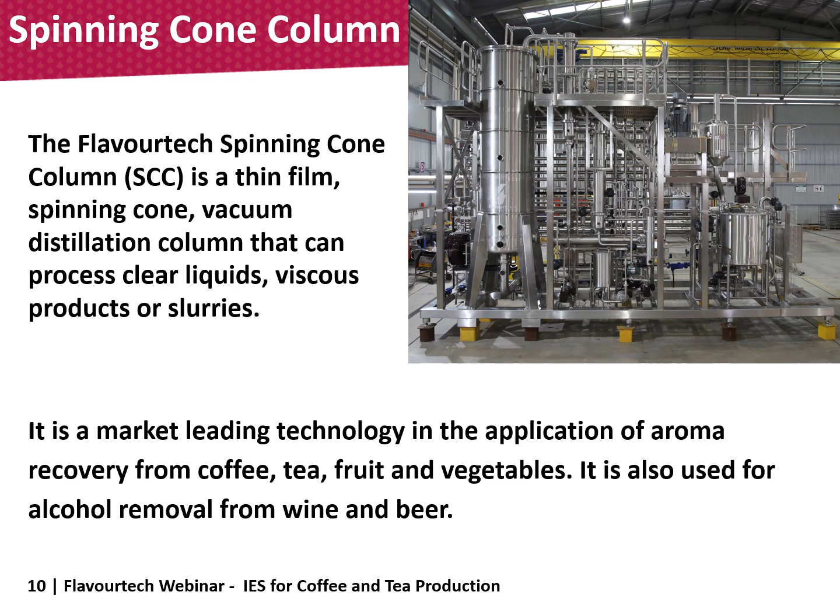In the opposite direction, we have steam going up the column, mixing with the product and picking up all the important volatiles. This steam vapor then exits the column, going through a condenser to create a very clear liquid aroma that can be used further on in the process.

The spinning cone column for tea and coffee, especially for ready-to-drink products, can not only capture the aroma, but can also brew the product in the 30 seconds that it takes to go through the column, making it very unique. The various parameters that are available on the spinning cone column also allow various flavors to be captured or various temperatures to be used to capture the very best aromas from the product that you are processing.

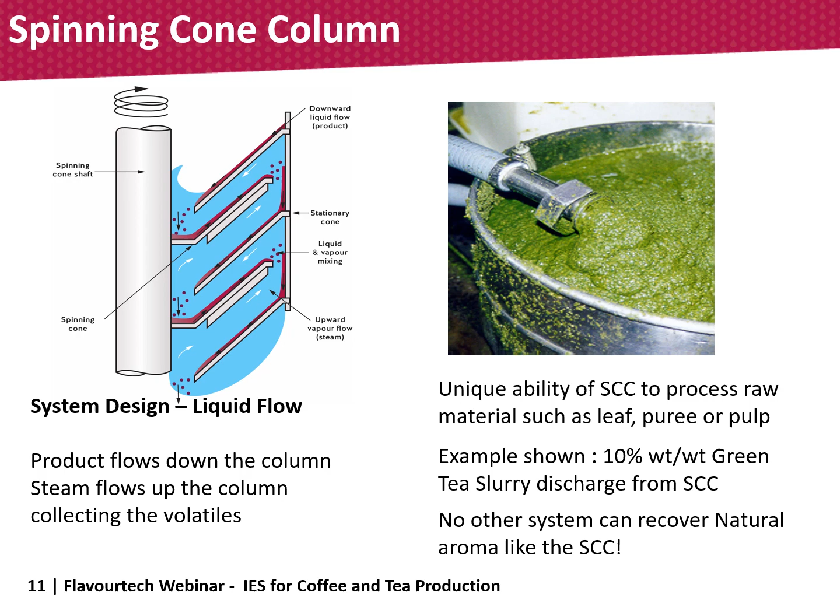As mentioned previously, Flavourtech's core business is in the tea and coffee industry, and for over 35 years we have been helping our customers produce the very best aroma from their process to be added to their final product. We now have over 100 spinning cone columns that are utilized to capture coffee aroma around the world, and over 70 spinning cone columns being utilized to make ready-to-drink tea products.

So Paul, I think I've been talking too much. Maybe you should do a little bit of talking.

Can you tell us a little bit about our Centritherm evaporator? Yeah, thanks Leon. The other core product in our range utilizes thin film as well with spinning cones, but it's called the Centritherm evaporator. This system is engineered to minimize product contact time to only 1 second, all while operating at low temperatures. These unique features make it an unparalleled solution across various industries.

Ideal for the concentration of delicate and heat-sensitive products, this evaporator ensures that the integrity of the products is preserved during the evaporation process. Its capability to handle viscous products adds to the versatility, providing a solution for a wide range of substances. It is suitable for the concentration of high-value products, particularly in small batches or as a final evaporation stage where the products become more sensitive as viscosity increases. It also excels in solvent removal, offering a comprehensive solution for industries requiring efficient and precise evaporation techniques.

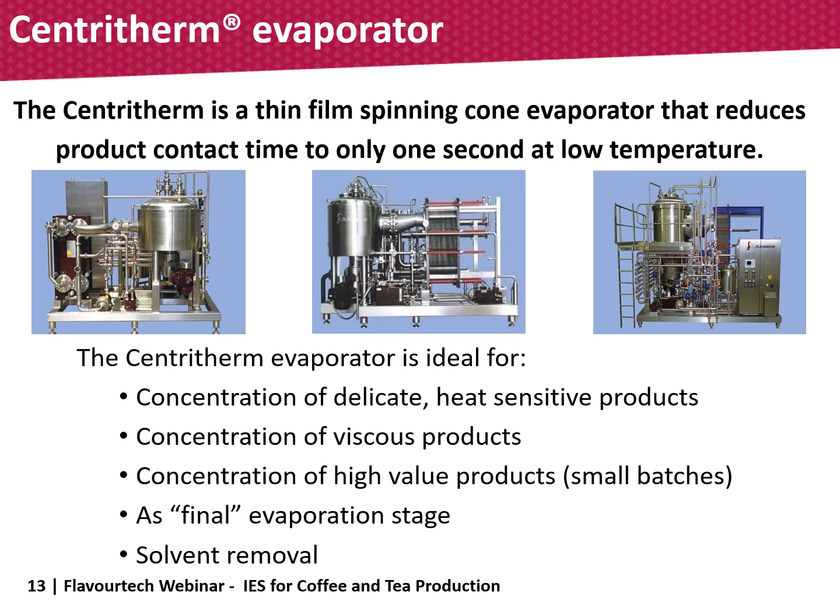One of the defining features of the Centritherm is the incredibly short residence time of just 1 second, setting it apart from conventional methods, which use much higher temperatures and much longer residence times. Unlike other evaporation processes, the Centritherm's swift 1 second residence time is a standout. In the case of coffee extracts, this rapid evaporation ensures that the coffee extract undergoes minimal exposure to heat, preventing any damage to its delicate composition. The low operating temperatures further contribute to the gentle treatment, preserving the integrity of the extract.

I suppose, Paul, what we should also point out is that the Centritherm evaporator is a very compact system and it's available in various sizes. This unit here that we have on the slide is our CT9 evaporator. It's about 3.5 meters tall, about 6 meters long, and it can evaporate up to 2.5 tons of water per hour. It's ideal to be used as a finisher in the coffee industry and take that concentrate from your traditional evaporator up further without any damage to color or flavor. That's correct, Leon. It's very versatile indeed, and there are various sizes to choose from.

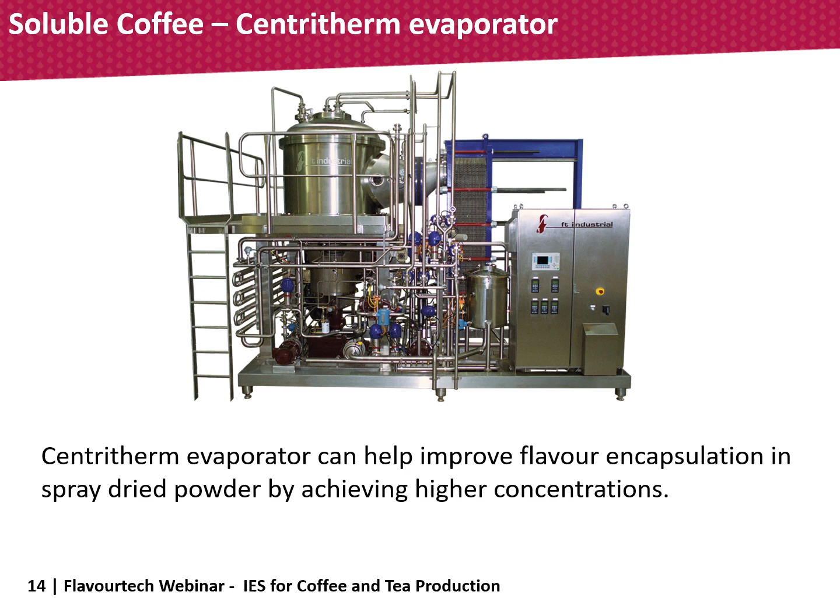Thanks, Paul. I'll take the next one, which is the rotating disc column, or the RDC as we call it. Now, this particular technology was developed by Flavourtech specifically for the coffee industry, and that'll become apparent as we move through the presentation. But it's a solid liquid contacted column that allows a solid and liquid to be processed, as I just mentioned. So in terms of ground coffee and water, it can be processed through the system where we can go up to temperatures of 190 degrees, pressures of almost 20 bar, and of course control the flow to do the solubilization of coffee as required to meet various yields.

The beauty of this is it's a continuous process. It's not a batch process or a semi-batch process. It's a continuous process, and it allows a solubilization of coffee in only 20 minutes.

Thanks, Leon. Moving on to our next technology. Now, Flavourtech is known for its gentle yet effective extraction and evaporation systems, but we have joined forces with Aquaporin with an exclusive distributorship agreement. This strategic alliance focuses on introducing their forward osmosis or FO products specifically tailored for the concentration of coffee and tea aroma, cold brew coffee and tea, extract concentration, as well as aqueous aroma concentration.

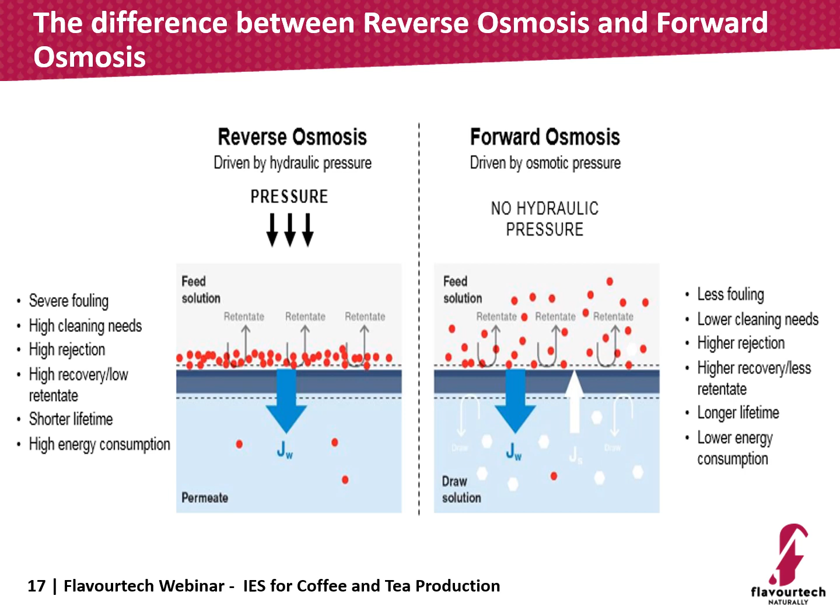The unique benefit of this particular Aquaporin forward osmosis system is the actual protein used to allow the water to traverse the membrane. Aquaporin proteins, which are found naturally in cells, were discovered in the 1990s, and the person who discovered it won a Nobel Prize for it. Aquaporin in Denmark were able to synthesize this and allow only water, selectively water only, to traverse the membrane compared to other forward osmosis systems.

Integrating the spinning cone column as the front end to the forward osmosis system allows the concentration of aqueous aroma, cold brew coffee and tea. The SCC, known for its efficiency in preserving delicate flavors, operates as a first step to the forward osmosis system, enhancing the overall quality of the final product. By leveraging the SCC's capabilities, producers can ensure a more authentic and vibrant aromatic profile in their final beverages. Forward osmosis, known for its low temperature operation and minimal energy requirements, complements the SCC's gentle extraction by utilizing osmotic pressure.

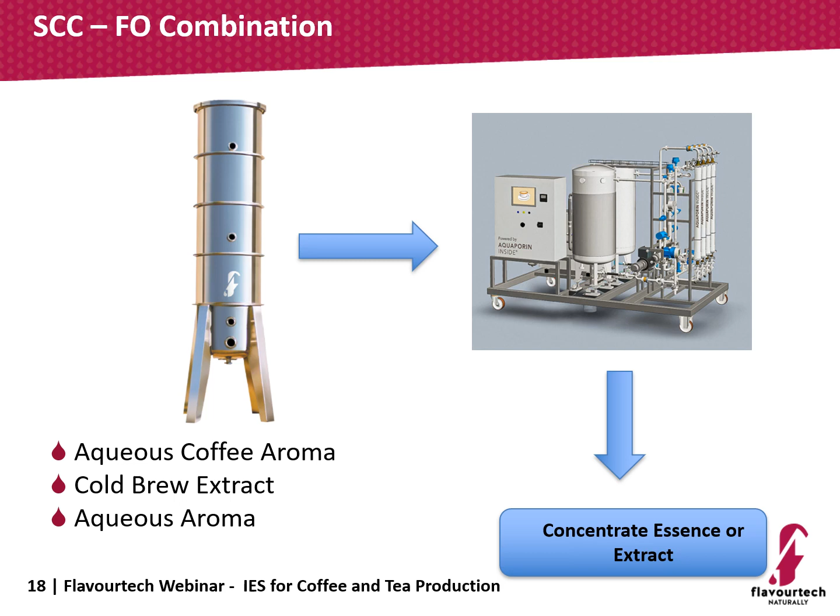Thanks, Paul. I think that explains FO to me and some of the benefits to it. So let's move on to some of these coffee and tea trends, which is really what's driving a lot of people's beverage business. Consumers are wanting more, as we mentioned, and they're looking at different ways to get their caffeine hit from coffee or tea at home or when they're traveling or at the restaurant. So let's see some of the different things that we're seeing out there.

So in the travels around the world, I'm seeing various products come out. Of course, the Asian market has been dealing with bottled and canned coffee and tea products for many years, but we're now seeing that expand worldwide. I've seen canned coffee in Australia, Europe, US. It's happening everywhere, but people are wanting better quality products.

I'm also seeing a growth in liquid tea and coffee concentrates, and lately that's been appearing on the shelf in supermarkets. That's not just for commercial drinking, but it's for taking home and actually producing something at home that you can drink on the go. Pods or capsules containing grounds have been around now for the last 5 to 10 years, but we're starting to see pods or capsules with liquid concentrate in them to produce a more authentic or more natural flavor.

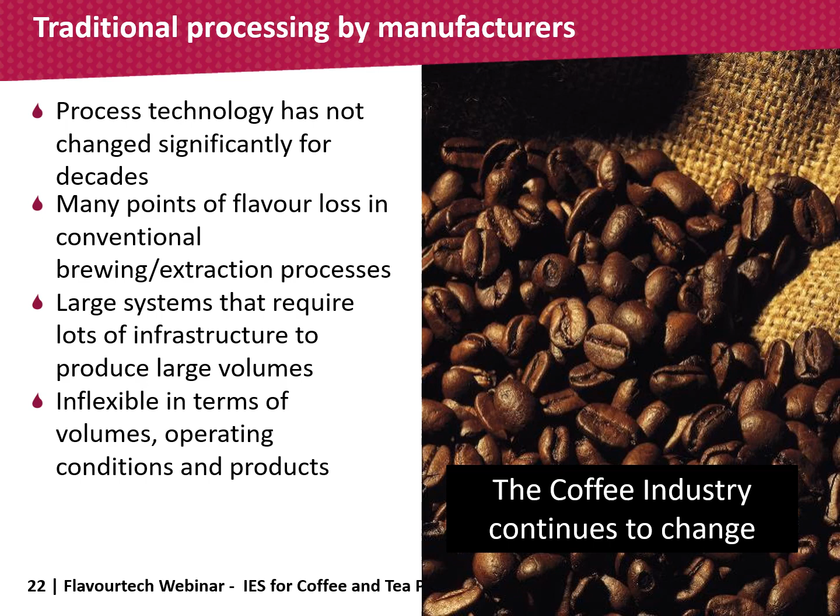This breakthrough meant that the flavors inherent in the coffee or tea were preserved and enhanced throughout the entire production process, creating a product with the original aroma intact. The IES represents a gentle process, ensuring that the final product maintains the integrity of the original flavor profile. Now, let's take a look at the IES itself. First of all, let's look at the IES approach to RTD coffee and tea.

Now, the IES consists of modules, as you can see from this photo here. This is an actual line in the US where the customer is producing RTD teas, coffees, and other products as well, which we'll go through in a bit more detail later on. Let's dive into the modules itself. Module 1 here, the first part of the system, consists of what we call a slurry preparation module, where the coffee beans and tea leaves are milled under a blanket of cold water.

Now, why do we do this? When you cut something or mill something, you can smell the light volatile desirable notes straight away. That's a loss. We don't want to lose it, we want to capture it. So it is milled under a blanket of cold water. Those volatiles are trapped. It then enters the next module, module 2 in this case, the spinning cone column, where we strip out those volatiles, condense it and store it, and look after it. The SCC brews the tea or coffee up to 100 degrees Celsius at the same time.

This extract then goes to the next module, module 3, a clarification process where it physically separates the extract from the coffee or tea leaf solids. Now, this can then be bottled or canned to produce the premium RTD products, or it can be sent down to the next module, module 4, the concentration step. But remember the unique benefits of the Centritherm evaporator with the 1 second heat contact time to produce a liquid concentrate which is of premium quality.

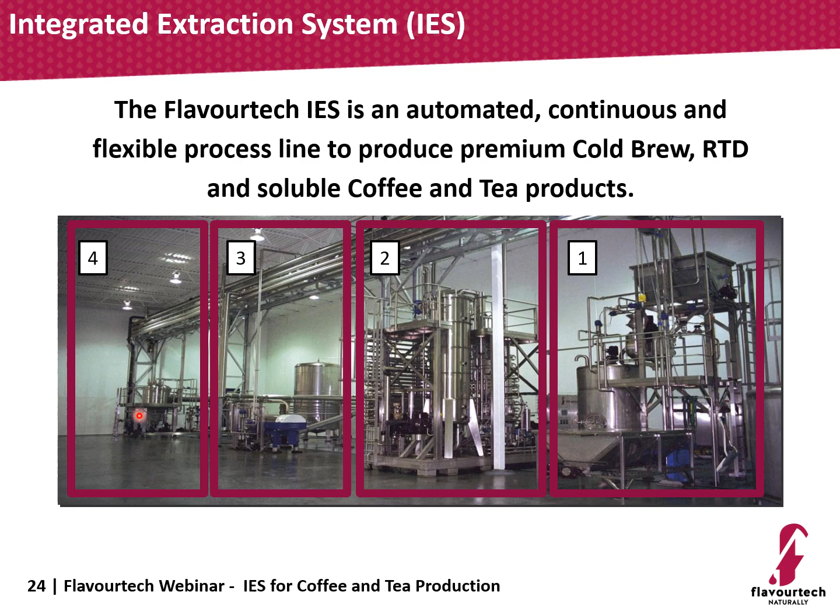The IES benefit lies in its ability to recover diverse aroma profiles from slurry, enabling producers to tailor the final product to meet specific consumer preferences. Unlike traditional methods, the IES eliminates the loss of aroma during the clarification process, preserving the richness of the tea or coffee essence. The IES ensures the retention of desirable characteristics from slurries.

This technology enables producers to maintain the distinct flavor notes that make the beverages stand out in a competitive market. The system excels in removing undesirable heavy notes, contributing to a cleaner and more refined taste in the final RTD product. So really what we're saying is that with the use of the IES, we can capture the very best natural aromas early on directly from the raw material, making a very distinctive product.

Because not only that, we can tailor those aromas depending on the different markets or categories that the manufacturer or producer wants to get into, whether it be different countries or just different market segments in its own country. That's correct. The consumer does have different flavor profiles that they like. The manufacturer can tailor make, as you said, those aroma profiles to suit the consumer.

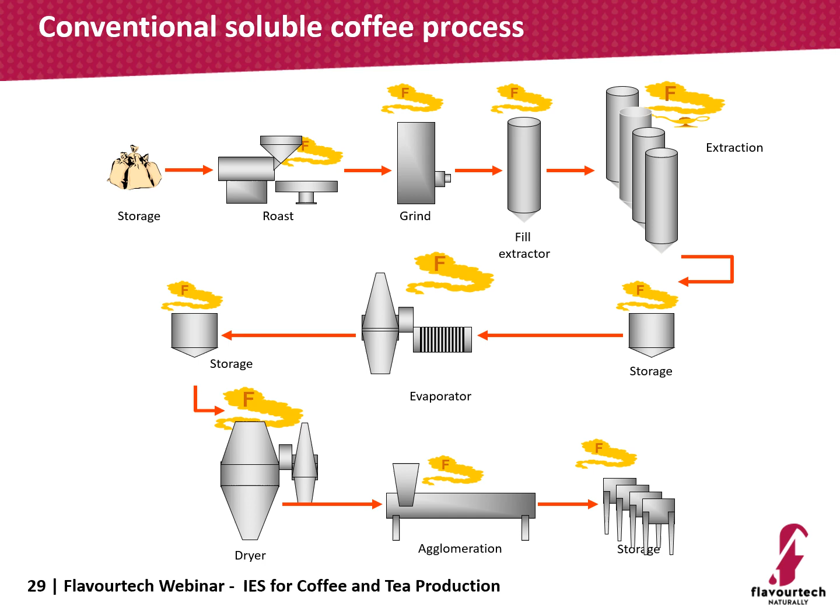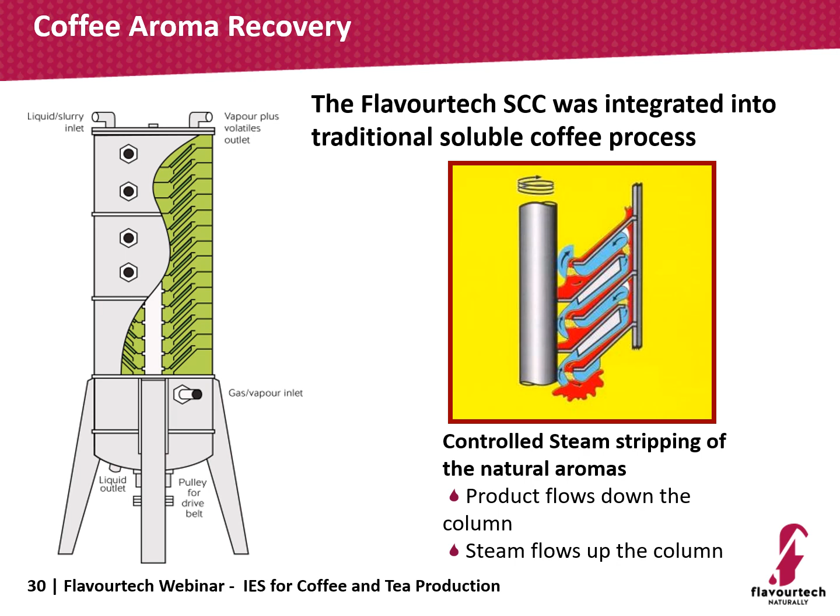So what the coffee companies have done is they've introduced an aroma capture device post extraction cell. Traditional coffee lines have got traditional aroma capture devices, but these have been replaced with the spinning cone column. As Leon has mentioned before, the spinning cone column is the gold standard when it comes to aroma capture. So the spinning cone column has replaced the systems post the extraction cell.

As you can see from this slide, the SCC is placed post the extraction cell and before the evaporation and spray drying. As I mentioned before, the evaporation process removes a lot of the desirable notes that are left in the extract. Now the SCC captures those notes in the extract and is placed back before the spray drying process, as well as removing some of the undesirable heavy notes. This allows a soluble coffee or the powder at the end to have the original notes post extraction to be placed back in.

So Paul, you mentioned spray drying. Can this also be used in the freeze drying process? It sure can. It is used also in the freeze drying process where the aroma from the extract is captured and then placed back before the drying, in terms of freeze drying or spray drying. Thanks.

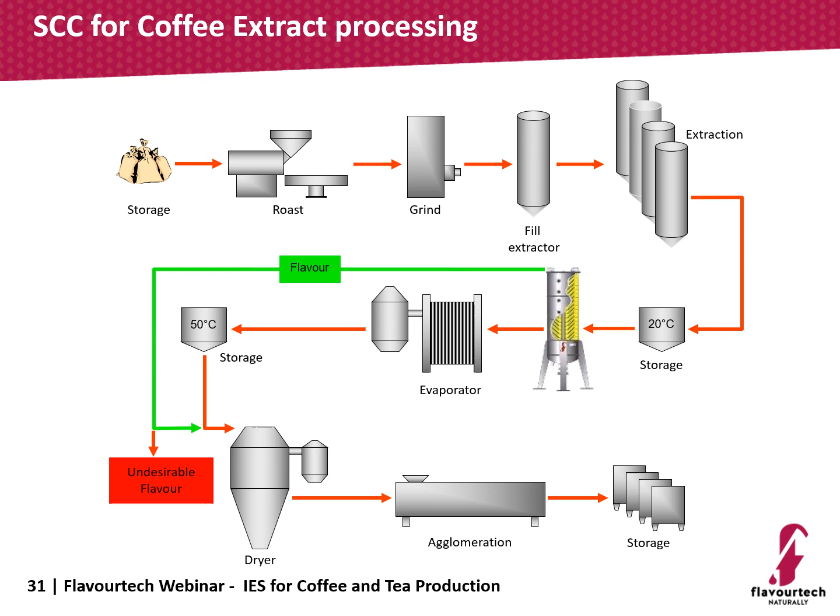But the customers have come back to us and said, how do we capture the real roast and ground flavors? Well, Paul, that's a question that both you and I have faced many times, and really, from our work with the flavour industry over many years, we've discovered that the very best flavours come from processing the raw material. You can't process just an extract and expect the full flavour of coffee to be there because you've changed that roast and ground note that you had. So the best way to capture the freshest flavours is to process the roast and ground coffee beans directly through the spinning cone column. And that's why we developed the IES process.

So as you mentioned before, the IES process for ready to drink is made up of those four main modules. The difference with the IES process for soluble coffee is the installation of the rotating disc column between module 2 and 3. So you first create the slurry in module 1. That slurry is then processed at 100 degrees through module 2, where you capture the desirable aroma compounds that you want by changing the operating parameters. It then goes into the RDC, where you do the solubilization of coffee, and then you clarify the slurry coming out before concentration. That aroma is then added back to that concentrate before the drying stage.

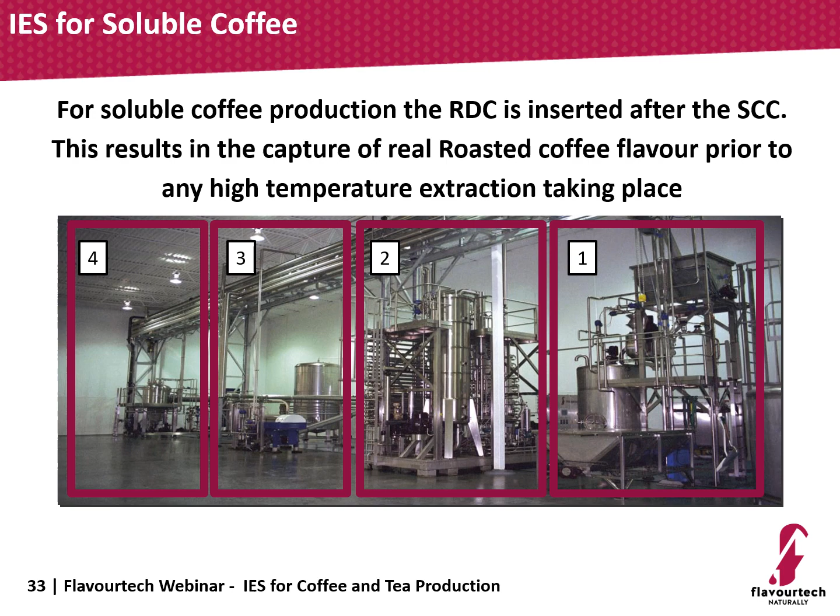So as mentioned previously, the rotating disc column is a continuous contacting device for solid and liquid interactions where we can control the temperature, up to 190 degrees, and the pressure of the system. And it's very quick. It only takes 20 minutes to do the solubilization, because the rotating disc column is a stirred system, not a static cell. We're also milling to a smaller size, which provides some advantages and allows the extraction to take place a lot faster. But that's not the important part.

The important part is that you are doing the extraction after aroma recovery. So you're capturing the best aroma from the roast and ground beans and then doing the high temperature extraction, which normally damages the flavors. So we've reversed the process that is found in the traditional soluble coffee process. That's a real advantage, Mr. Leon. I must agree with you. You do capture those real desirable roast and ground flavors up front compared to other traditional processes.

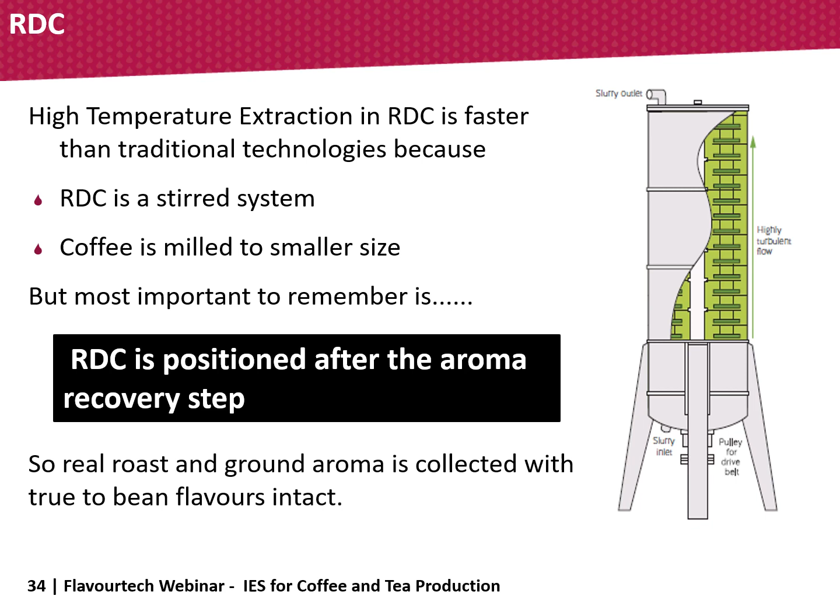Correct, and we've seen this various times now where the single origin flavors are retained in the final powdered product, whether it be freeze dried or spray dried, and that's the aha moment our customers have when they utilize the IES process.

So just to go through a simple schematic and show it a little bit more simply, the roasted coffee beans go to our slurry preparation step where we mill them under that blanket of water, as Paul mentioned, to create a slurry. That slurry then goes to the spinning cone column, and in less than 30 seconds, not only are we capturing desirable aroma by being able to manipulate different operating parameters, but we're also doing the brewing of the coffee at 100 degrees.

That slurry then goes through a decanter to create that extract. Now, we call it extract 1, or our low temperature extract. If you add flavor to that, hey presto, you can be producing ready to drink products and taking them to market by going straight to a bottling line from there and adding your sugars or other products that you'd like to make a ready to drink product.

However, if you want to produce soluble coffee, those coffee grounds that have come off the decanter in the first line are reconstituted with water to produce a new slurry, which then goes through the rotating disc column at temperatures of up to 190 degrees, and in only 20 minutes, a high temperature extract is produced. That slurry coming out of the rotating disc column goes through the decanter, the coffee grounds can be discarded, and that extract 2 is what then moves on to the next step.

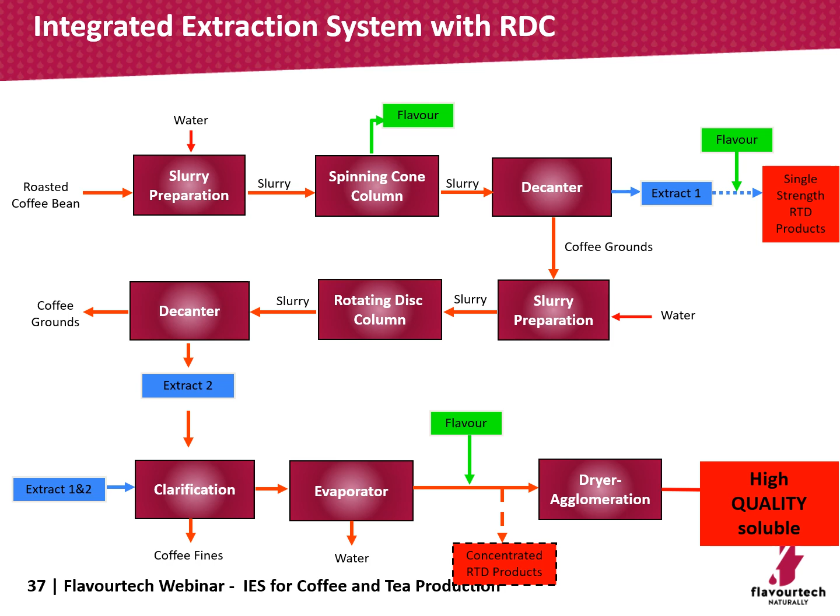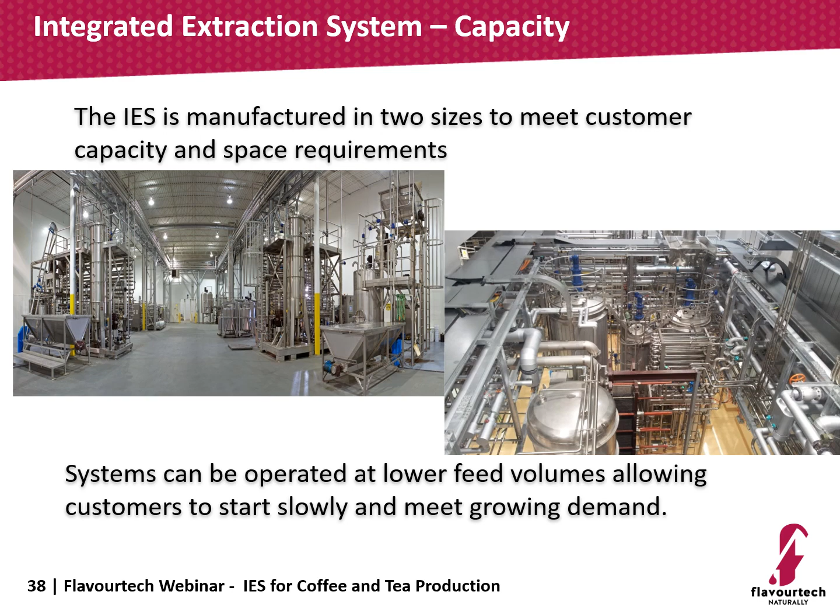Now the systems are available in 2 different sizes. Here we have examples. The one on the right is a customer in Japan where they're producing RTD coffee. It shows you that there's minimal space, but we're able to engineer and design a system to suit the customer space requirements. The one on the left is a US customer where they're running in parallel production of RTD tea and coffee, as well as soluble coffee. Now the systems can be operated at lower feed volumes, allowing the customers to start slowly and meet growing demands in the future.

So let's recap the benefits of the IES. It is a continuous and automated process. Leon has shown you how compact the size is. There's 2 different sizes. We're able to design and engineer systems to your space requirements. It can be used for the production of soluble as well as RTD and cold brew products, allowing a flexibility of operation. Now, continuing with the IES benefits, the SCCs are able to produce various aroma profiles to meet the consumer demands.

The other advantage is the short startup and shutdown times. For example, if you're operating 5 days, you can start up very, very quickly, operate those 5 days and shut down as well. So it allows you the flexibility in operational days. The other thing is that everything has to work seamlessly and has to be cleaned in place as well. So each module has a CIP built in to allow the modules to be cleaned separately.

So Paul, I'd just like to mention something on point 1 there. What I've seen some of our customers do is very easily be able to produce final powdered products with different aroma profiles that they then take to their customers and say, which one do you like? Previously, they didn't have that flexibility. It wasn't that easy to produce final powder products with those different aroma profiles. But with the IES, it's very simple.

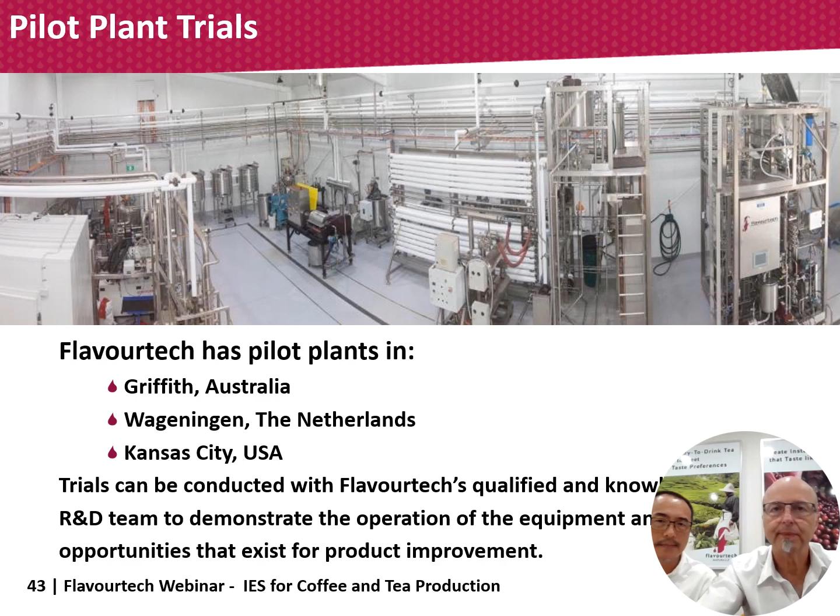As you mentioned, Paul, the IES does come in two different sizes and, of course, different capacities. Our smaller system, the IES 25, as we call it, uses our medium-sized spinning cone column. And what I failed to mention earlier is that we do make the spinning cone column in three different sizes. An SCC 100 that can process up to 100 litres per hour. The SCC 1000, again, can process a nominal volume of 1,000 litres per hour. And the SCC 10,000. Now, the IES 25 uses the SCC 1000 and it can process up to 700 kilograms per hour of slurry. Now this can be up to a 10% by weight of tea slurry or up to a 20% coffee slurry.

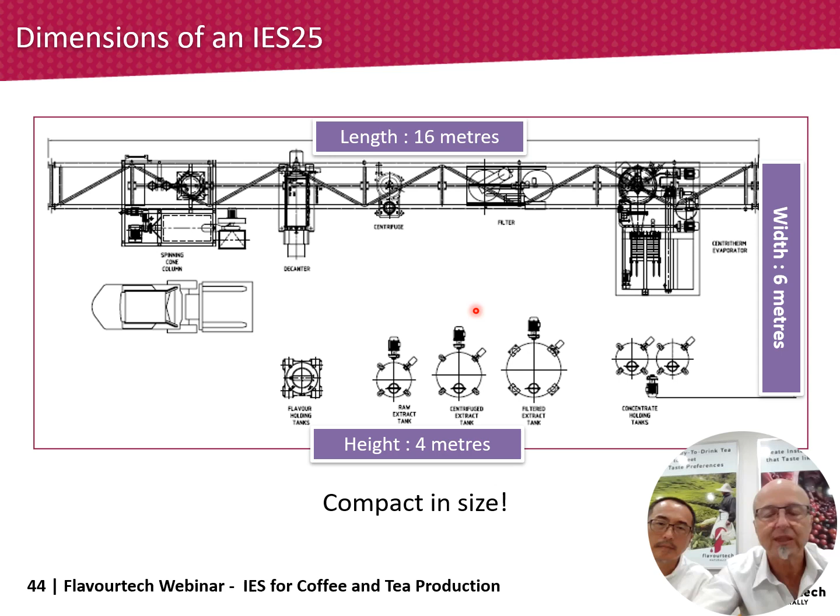So the spinning cone column with the slurry preparation unit can be found on the left hand side here. From there the slurry would go through a decanter. Here we've illustrated it with a centrifuge and also a membrane system before that extract goes to our Centritherm evaporator. And of course, as mentioned earlier, the Centritherm evaporator can be manufactured and supplied in various sizes depending on the capacity requirements. In this particular schematic, we've also got the tanks that are required to run an IES 25, and you can see that the whole space that is required is 16 meters in length by 6 meters in width and 4 meters in height. So it is a very compact system, and in fact this can be brought closer together. We've illustrated it with space to allow forklifts to get in between the equipment, but it can be a lot more compact in size.

Thanks, Leon. Before you lose your voice there, because your voice is getting a bit hoarse. But thank you, Paul. There's a couple more questions that have come through.

Now, can the IES be used other than for tea or for coffee? Yes, of course. We do have various customers that do contract work where they're producing tea and coffee products, but of course can also process fruit flavors and fruit purees.

In fact, we have one customer that takes waste raw material, banana peels, watermelons, ripened fruit, and is able to make natural aromas with those products through the spinning cone column, using the decanters to separate the slurry, and processing extracts if they wish, but more importantly, capturing natural aromas from other raw materials such as fruit products.